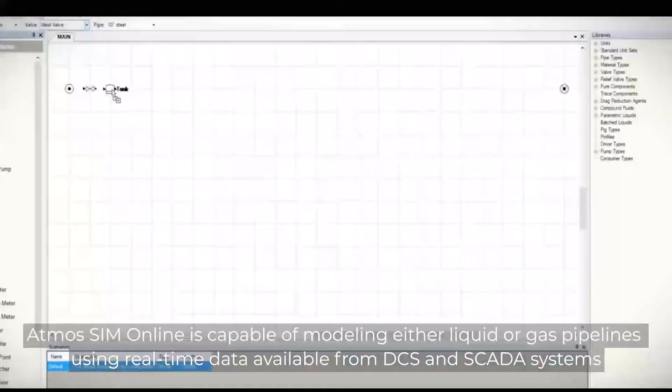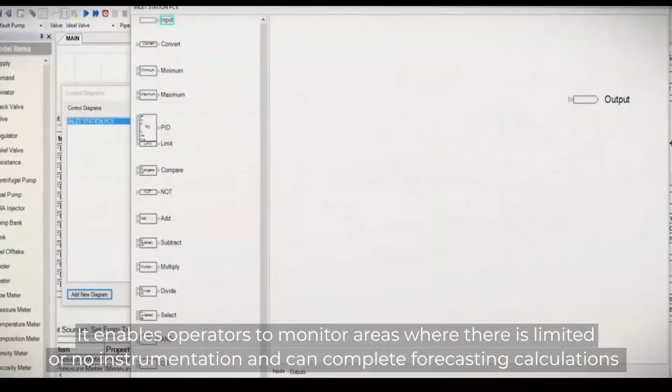Atmos SIM Online is capable of modelling either liquid or gas pipelines using real-time data available from DCS and SCADA systems. It enables operators to monitor areas where there is limited or no instrumentation and can complete forecasting calculations, which allows operators to view the current pipeline conditions based on current or simulated what-if scenarios and assess the safety of the schedule.

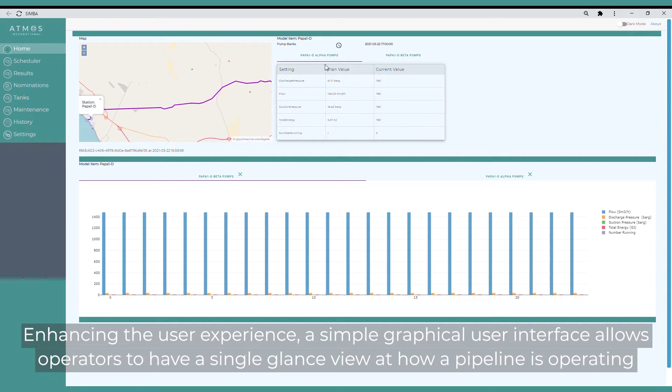Enhancing the user experience, a simple graphical user interface allows operators to have a single glance view at how a pipeline is operating. Atmos SIM has a range of functionalities including Atmos SIM Offline, enabling pipeline design, hydraulic studies and training to take place in a realistic environment without disruption to existing operations.

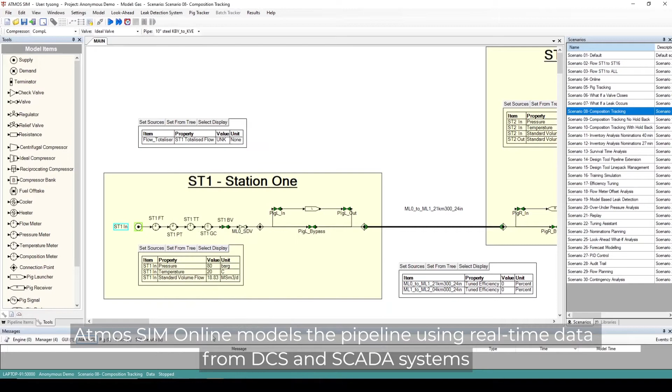Atmos SIM Online models the pipeline using real-time data from DCS and SCADA systems. It allows operators to monitor areas where it has limited or no instrumentation, such as at mixing points or subsea, and provides confidence in pipeline behaviours.

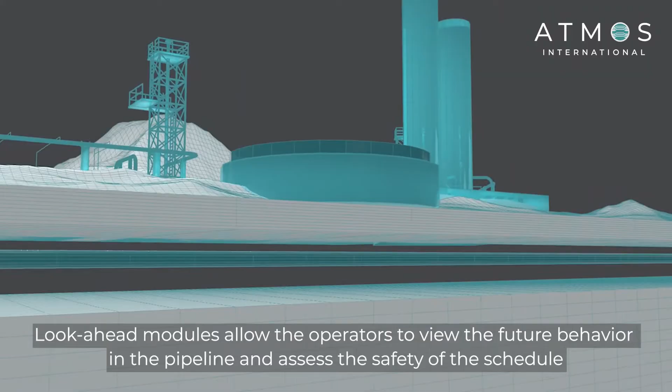Look-ahead modules allow the operator to view the future behaviour in the pipeline and assess the safety of the schedule. Look-ahead modelling shows what will happen if the pipeline continues to operate in its current state. Predictive modelling shows the pipeline's behaviour in a variety of future scenarios that can be configured, saved and used again.

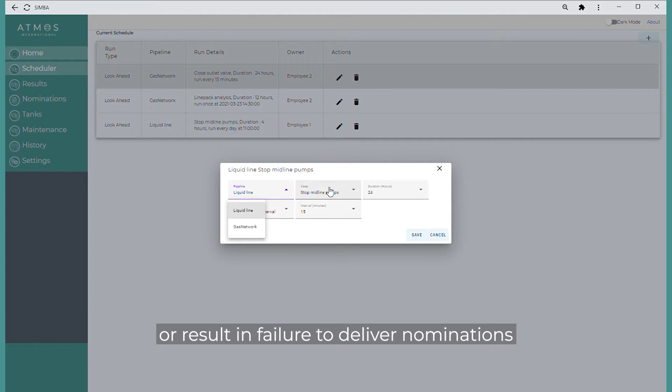Alarms can be configured for a variety of set thresholds to determine if the current schedule is likely to violate safe operating conditions or result in the failure to deliver nominations. Atmos Simulation supports the industry's view of prevention, detection and containment. So let's look a little further into some of the functionality of Atmos SIM.

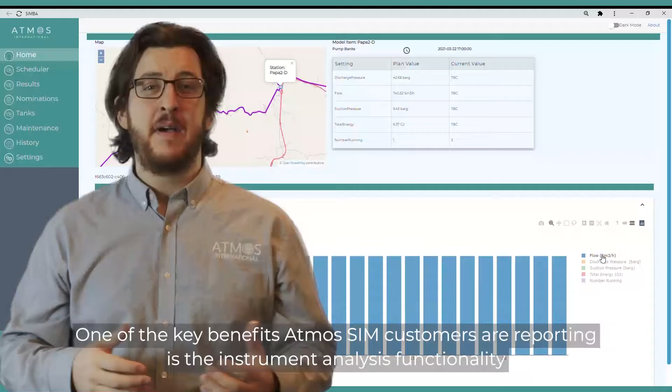One of the key benefits Atmos SIM customers are reporting is the instrument analysis functionality. This feature is standard for Atmos SIM to ensure models always return accurate results. Atmos SIM achieves this by comparing real-time data acquired from field instrumentation with the calculated values which are returned from the simulated pipeline model.

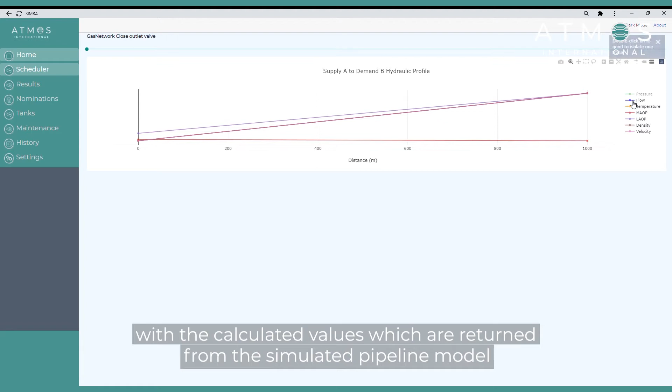When this comparison returns a difference, Atmos SIM can determine if the field instrumentation has developed a fault, as it can benefit from the surrounding instrumentation values and not focus on the difference in isolation, and identify the value as an outlier.

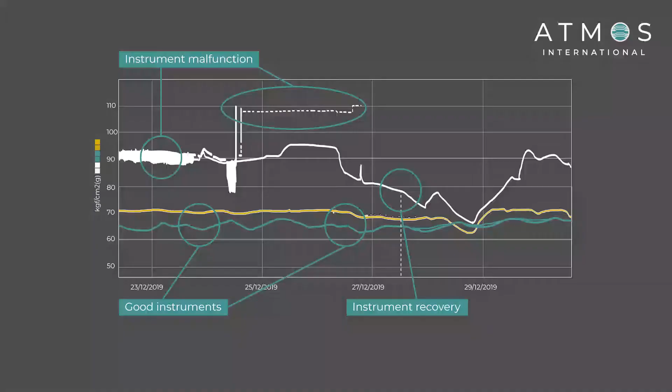An example of this can be seen here. By comparing the measured values in the dotted lines with the model calculated values in solid lines, an instrument malfunction is identified. It is this comparison that Atmos SIM users have taken to the very next level.

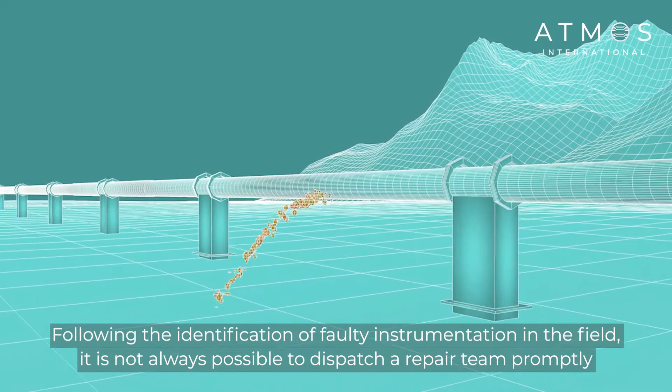Following the identification of faulty instrumentation in the field, it's not always possible to dispatch a repair team promptly due to the availability or even having the essential equipment to complete the repair. This was prevalent during the pandemic.

In this circumstance, users have been able to integrate the simulated values into the SCADA or DCS and override them in the human-machine interface displays to enable the operations team to safely operate without the need to constantly note which values are unreliable.

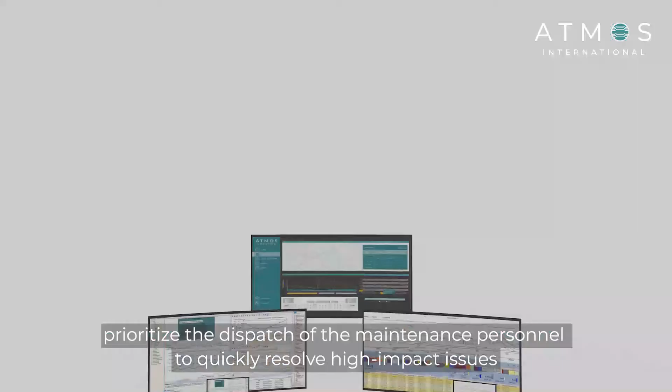Before this integration, the control room would have been reliant on a systematic approach to the maintenance of each instrument, which would have been done on a schedule rather than this proactive approach to the issue documented above.

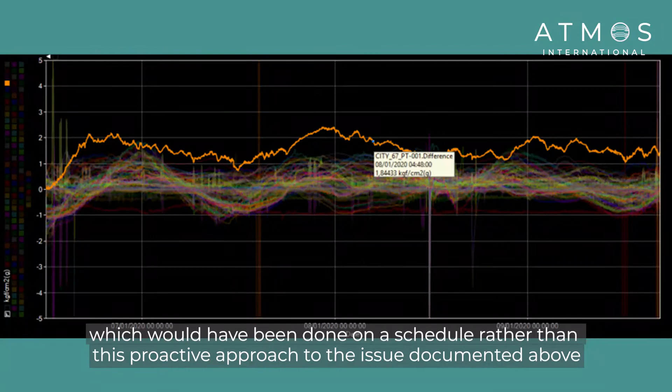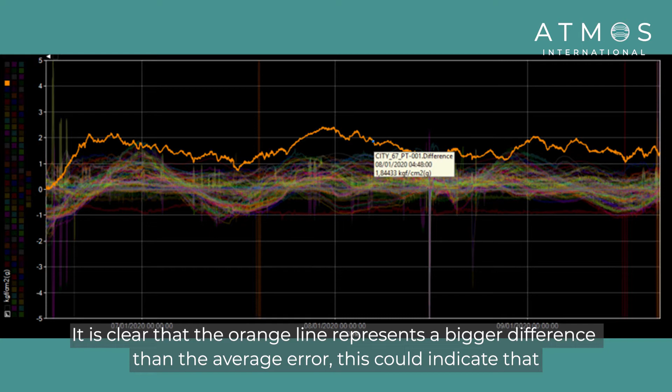The image on screen here shows the difference between measured and calculated pressures. It is clear that the orange line represents a bigger difference than the average error, and this could indicate that some maintenance is required for this particular pressure meter.

The COVID-19 pandemic has caused additional challenges to pipeline operators and left some of them with reduced staff sizes. Operations teams with reduced members have used Atmos SIM to quickly identify faults with critical instrumentation. The software has enabled them to isolate the issues by overwriting the measurements with trusted simulated values.

This has enabled users to continue to operate their pipelines with confidence while a maintenance team is dispatched and problems are resolved.

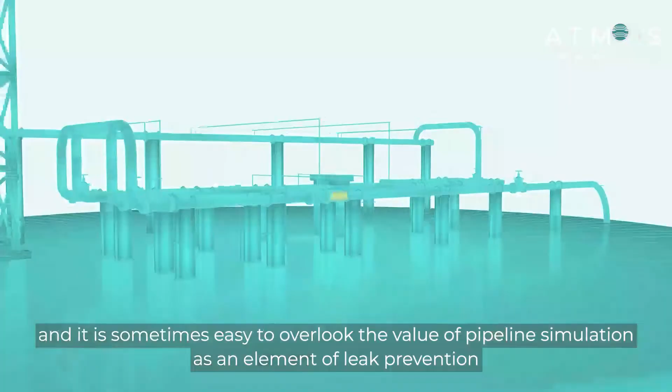Atmos International is known within the industry for leading leak detection solutions, and it's sometimes easy to overlook the value of pipeline simulation as an element of leak prevention. Atmos SIM can foresee developing issues and provide early warnings hours before any action is required to avert a crisis with the look-ahead feature.

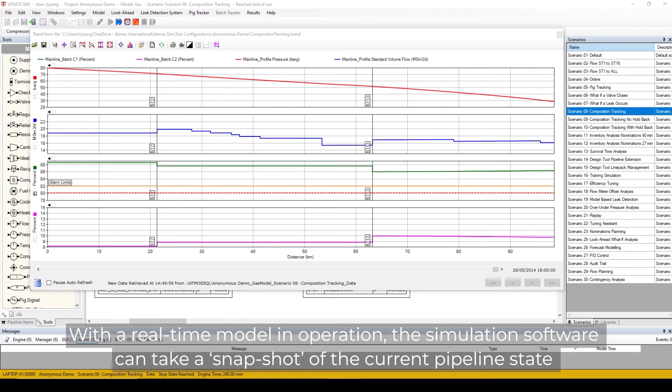With a real-time model in operation, the simulation software can take a snapshot of the current pipeline state and calculate what will happen in the future and return alerts if the pipeline limits are to be exceeded, and a predicted time when this would occur.

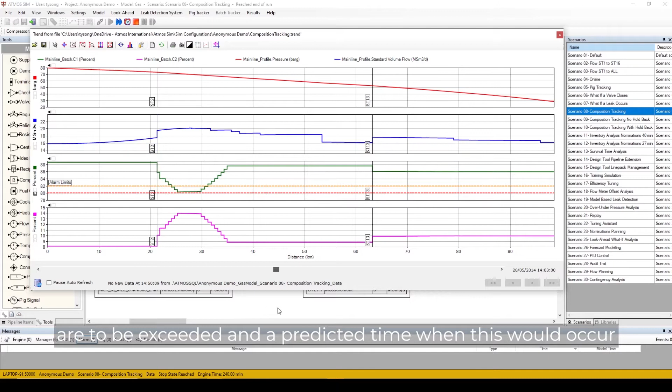Similarly, it can predict the future security of supply by running look-ahead modelling against schedules and nominations. This type of operation can be manually triggered, but it's typically automated to run as frequently as every 15 minutes for short-term calculations in the region of 24 to 48 hours ahead, to every hour for long-term calculations.

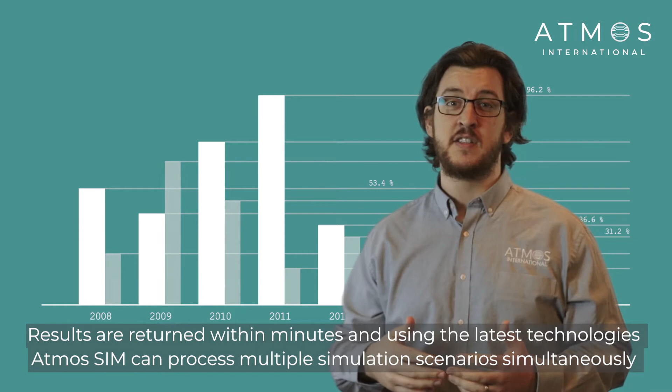Results are returned within minutes, and using the latest technologies, Atmos SIM can process multiple simulation scenarios simultaneously so that operators can have accurate information quickly to act upon proactively with confidence rather than making reactive decisions to an unfolding disaster.

Atmos SIM has overcome the limitations of other RTTMs in achieving the maximum sensitivity and shortest detection time under all operational conditions. Atmos SIM incorporates the proven statistical algorithms from the most deployed leak detection system in the world, Atmos Pipe, to minimise false alarms.

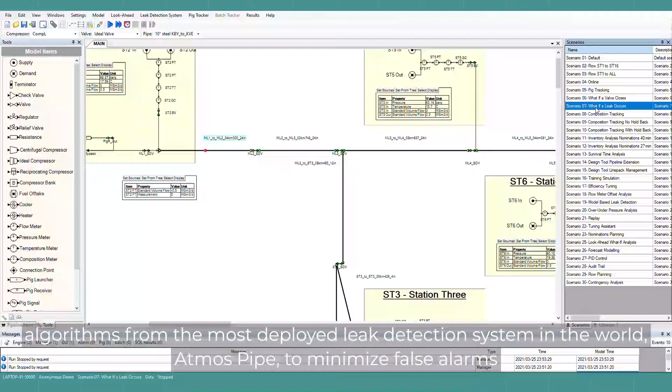Atmos SIM's leak detection module continuously calculates the volume balance, and this volume balance is obtained by calculating the total flow into the pipeline minus the total flow out of the pipeline, corrected by the inventory changes calculated by Atmos SIM. The volume balance is statistically analysed by the sequential probability ratio test, SPRT, which calculates the ratio of leak probability over no leak probability.

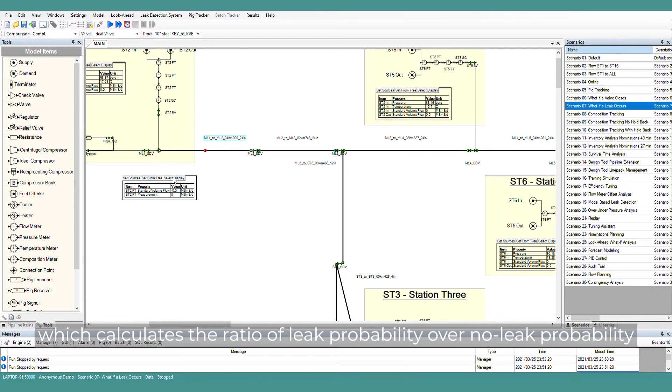This ratio is then tested against the alarm threshold to provide optimal leak detection.

Atmos SIM also monitors the discrepancies between measured and calculated pressures and flows. These discrepancies are also processed by the sequential probability ratio test to generate reliable leak alarms.

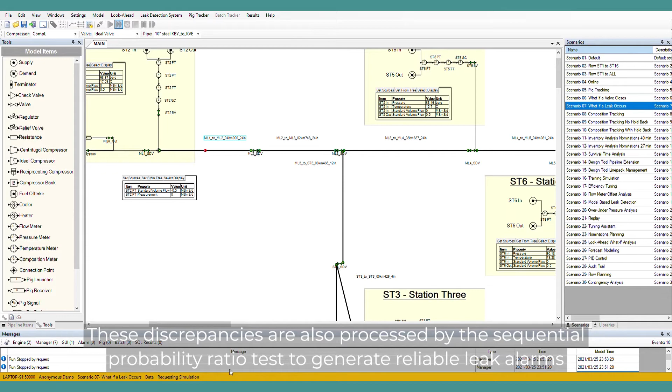Atmos SIM is especially suitable for pipelines where it is not feasible to install intermediate flow meters and pressure sensors, such as subsea. Atmos SIM accurately models pipelines with minimal instrumentation, for example, flow and pressure meters at the pipeline inlets and outlets only. Also, it can model pressure sensors upstream and downstream of intermediate pump or compressor stations.

Using Atmos SIM, leak detection offers the following benefits: increased stability of the leak detection system by removing the effects of instrument errors; increased sensitivity through learning long-term instrumentation offsets; reduced false alarms through the SPRT algorithm; consistency through using the same software across all pipelines; no need to increase the leak size thresholds during transient operations; and saves time through reduced errors.

Let's look at some of the features and benefits of Atmos SIM.

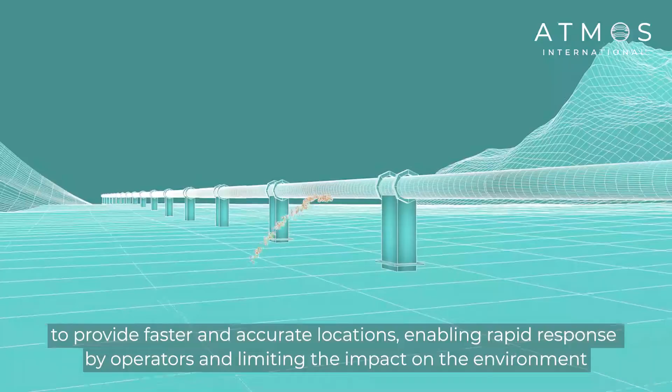The following leak location methods are combined with Atmos SIM to provide faster and accurate locations, enabling rapid response by operators and limiting the impact on the environment. These methods are flow imbalance ratio and pressure difference.

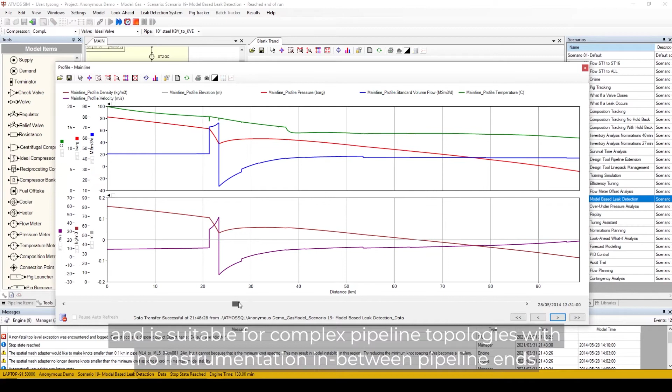This leak location method uses flow imbalance ratios at the boundaries of each leak detection unit and is suitable for complex pipeline topologies with no instrumentation in between pipeline ends.

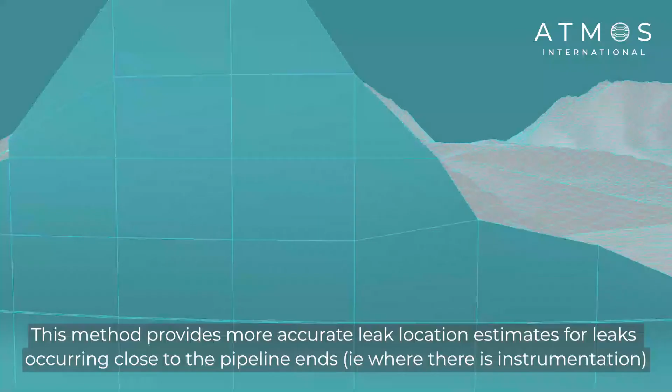This method provides more accurate leak location estimates for leaks occurring close to the pipeline ends, where there is instrumentation. The basic idea behind this leak location method is that when a leak occurs, the measured pressure values will change the most near the leak location.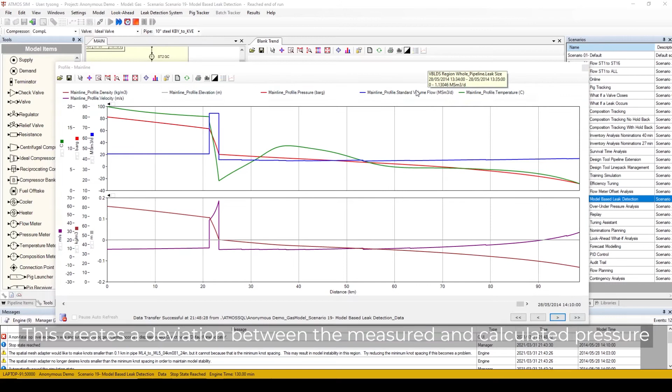The model is not aware of the leak, so it will provide a leak-free value at the meter location. This creates a deviation between the measured and calculated pressure. By comparing the differences between the modelled and measured values at the pressure meters, we can identify where the leak is by finding the meters with the largest differences.

The combination of these two methods provides the industry with an accurate leak location solution, even for complex pipeline networks.

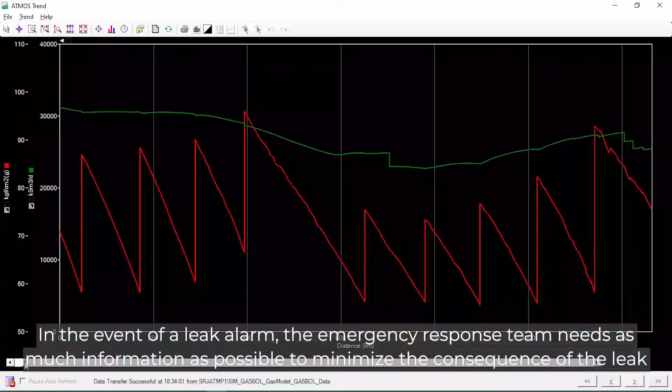In the event of a leak alarm, the emergency response team needs as much information as possible to minimise the consequence of the leak. In addition to the leak rate and location, the hydraulic profile of the pipeline close to the leak is essential. Atmos SIM provides a very accurate hydraulic profile of the pipeline based on the elevation data and accurate simulations.

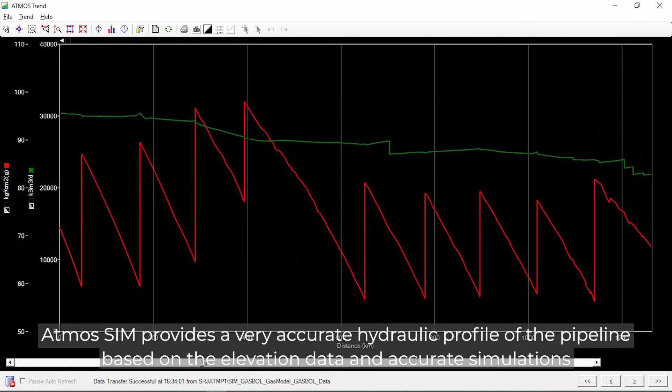When we are looking at containment with respect to a leak event, it is essential that we have accurate leak size and location estimates to work from. Atmos SIM provides reliable leak size and location estimates without the need for specialised equipment, and limited only by the quality of the field instrumentation.

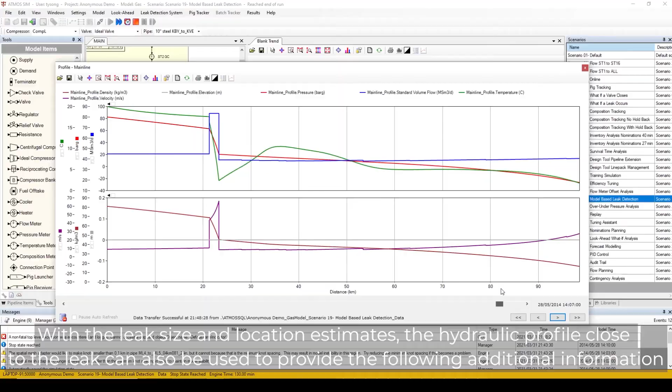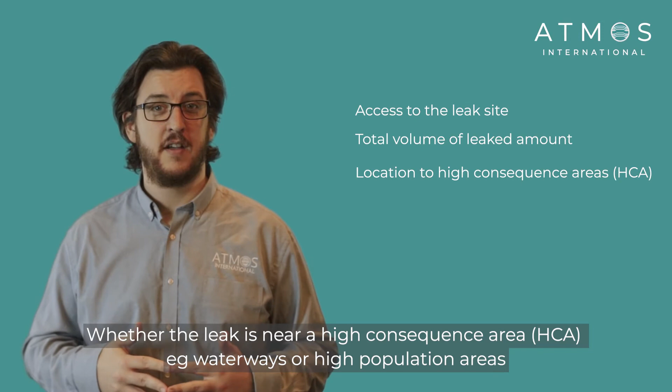With the leak size and location estimates, the hydraulic profile close to the leak can also be used to provide additional information: access to the leak site, total volume of leaked amount, whether the leak is near a high consequence area such as waterways or high population areas. For liquid pipelines, potential spillage routes, availability of remote operated valves for isolating the leaking pipeline segment, and the location of the nearest emergency response centre.

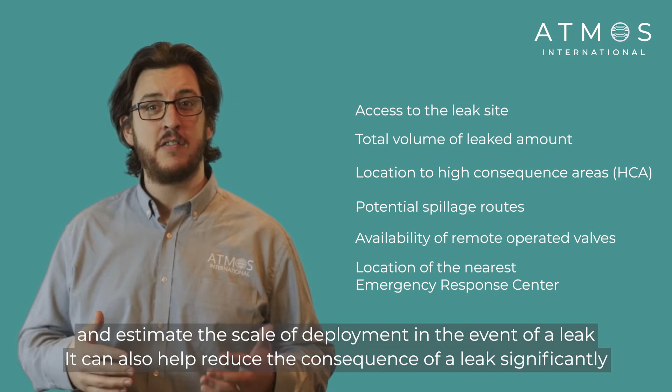This information will help plan the emergency response and estimate the scale of deployment in the event of a leak. It can also help reduce the consequence of the leak significantly.

So far, we have discussed how Atmos SIM can support prevention, detection, and also touched on containment in the form of hydraulic profiles and leak location. What we're also able to do with Atmos SIM Online is to trigger look-ahead scenarios based on actual alarm events.

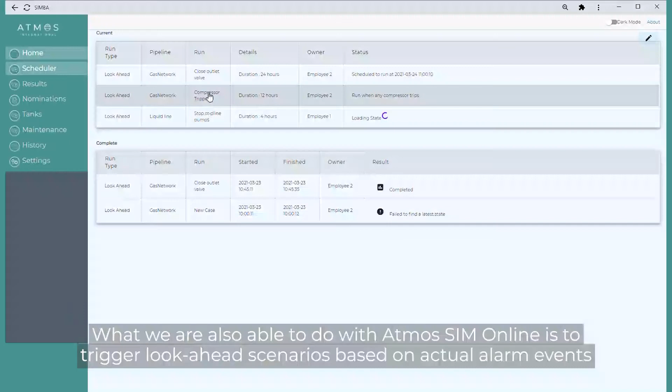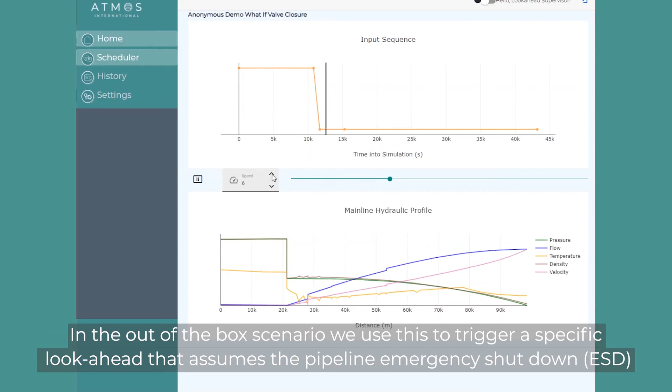For example, upon a leak alarm being generated, we use the leak-free state and apply a leak point at the location returned by the leak detection module. In the out-of-the-box scenario, we use this to trigger a specific look-ahead that assumes the pipeline emergency shutdown is triggered and isolating the leaking segment. We then calculate the total product volume lost and how long it would take for the segment to empty.

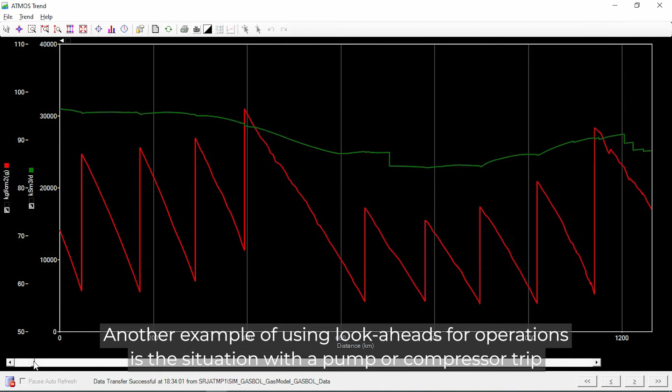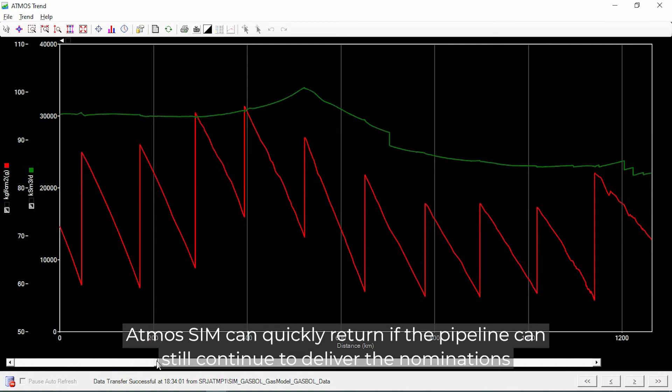Another example of using look-aheads for operations is the situation with a pump or compressor trip. By running a survival time scenario automatically on this trip, Atmos SIM can quickly return if the pipeline can still continue to deliver the nominations, and trigger further events in the form of minimum inventory alerts. It can also support this alert further by returning the time when this would happen, giving the pipeline controllers the time they have to get the pumps or compressors operational again before it impacts on the nominations.

In this showcase, we've given you an extended overview of Atmos International simulation solutions. So why is Atmos SIM better than other real-time transient models?

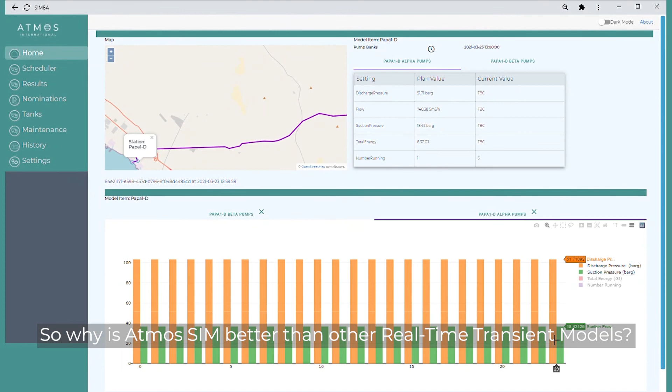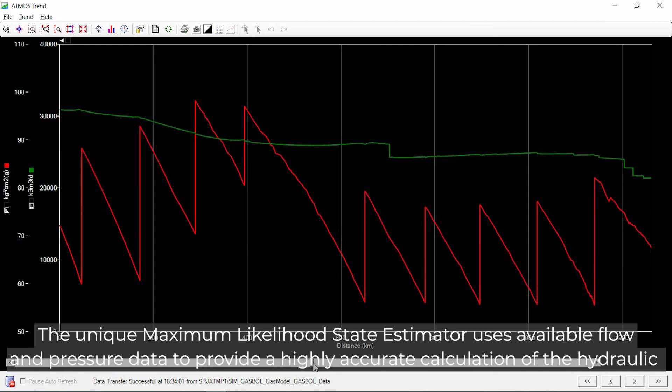Atmos SIM can model the hydraulic behaviour of both gas and liquid pipelines accurately. The unique maximum likelihood state estimator uses available flow and pressure data to provide a highly accurate calculation of the hydraulic and compositional properties of the product in the pipeline network.

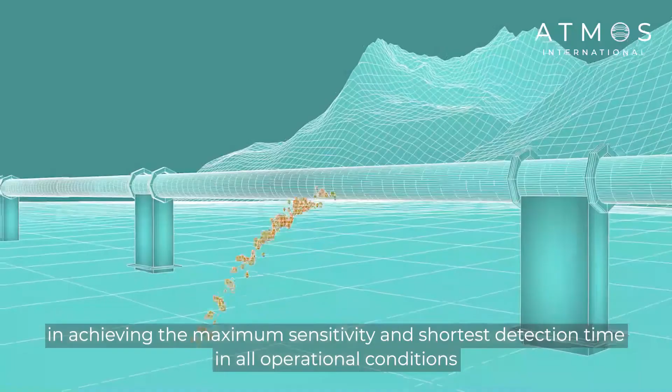For leak detection, Atmos SIM has overcome the limitations of other RTTMs in achieving the maximum sensitivity and shortest detection time in all operational conditions. It incorporates the proven statistical algorithm, sequential probability ratio test, to minimise false alarms.

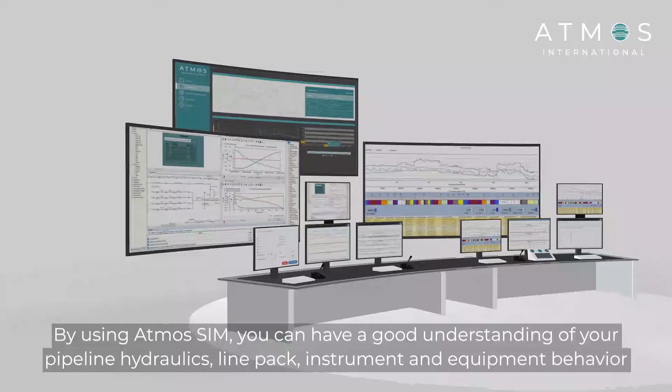By using Atmos SIM, you can have a good understanding of your pipeline hydraulics, line pack, instrument and equipment behaviour. You can look into the future by running multiple scenarios quickly to take preventative actions before you miss a nomination or violate a pressure limit.

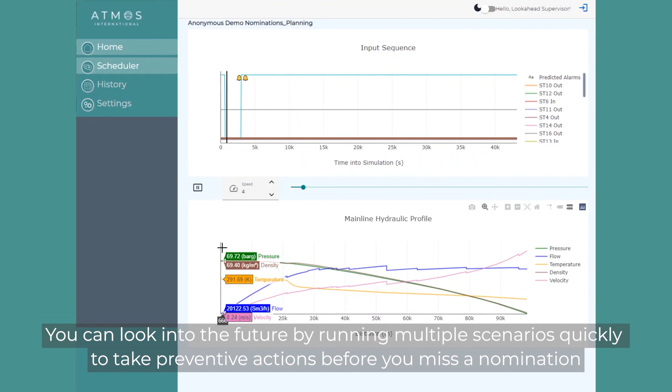And you can minimise the consequences of a leak by planning emergency responses correctly with the maximum information on leak rate, location and hydraulic profile.

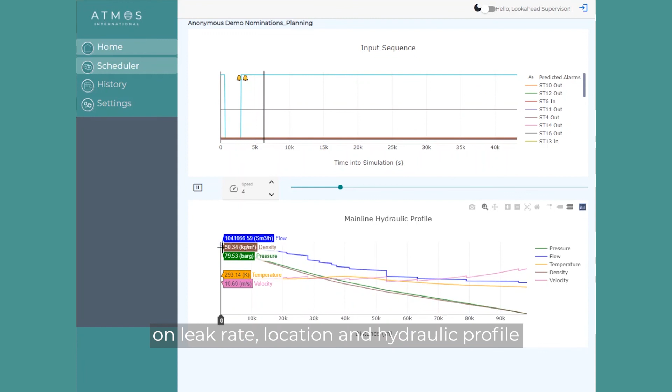Thank you for watching the Atmos International Showcase on our solutions for pipeline simulation and operations.

It's important to remember that every pipeline is different, and this means solutions need to be considered individually. The Atmos International approach is to apply fresh thinking to our customers' challenges.